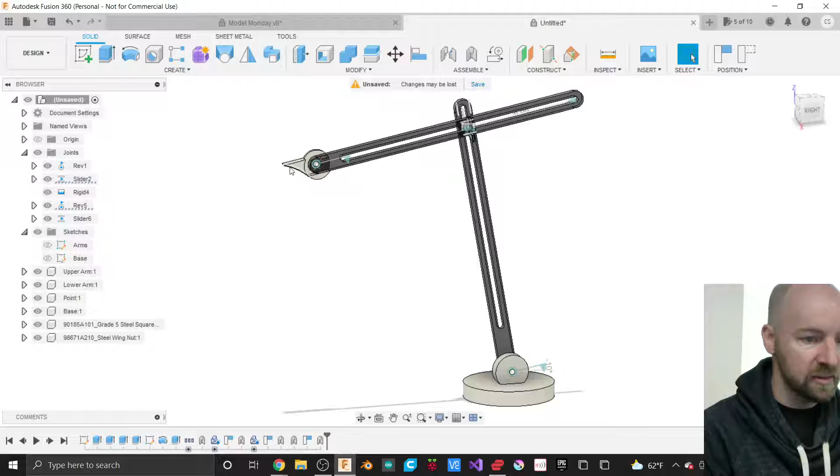So this point sets the height, and it sets the width, the opening of our pot here. But for our purposes in this class, it's an excuse for us to make a whole bunch of joints.

So there's a joint here at the end. We've got revolute joints, which we made in the last class. However, we also have sliding joints in this, so this gauge can slide up or down, so you can make it any height you need to. You can rotate it at the base, or lean it in if you want to. Obviously you'll be able to rotate it here as well.

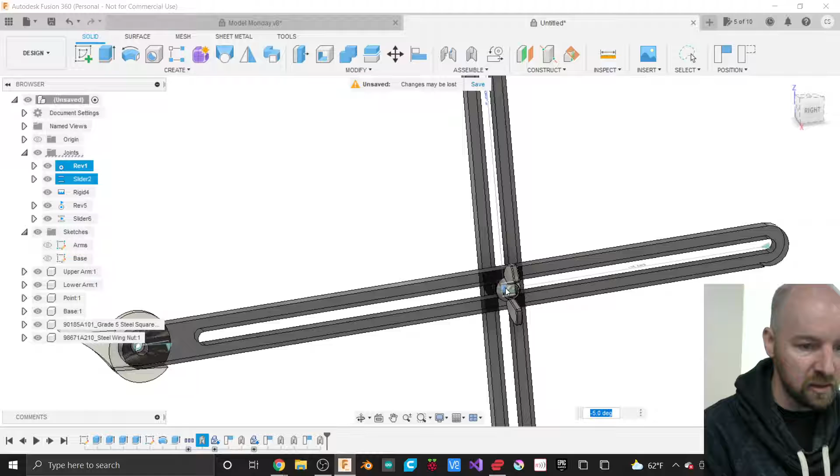However, I wasn't able to figure out how to add that joint in Fusion, so that'll be research for me for the next class.

But as you can see, we've got a whole bunch of joints, and you can slide them around and move them back and forth one at a time. Unfortunately, you can't do multiple joints at once, but you get the picture.

This base I'm imagining 3D printing, and then these arms I'm imagining laser cutting out of some plexiglass, so that'll be an easy process. And without further ado, let's go ahead and make this.

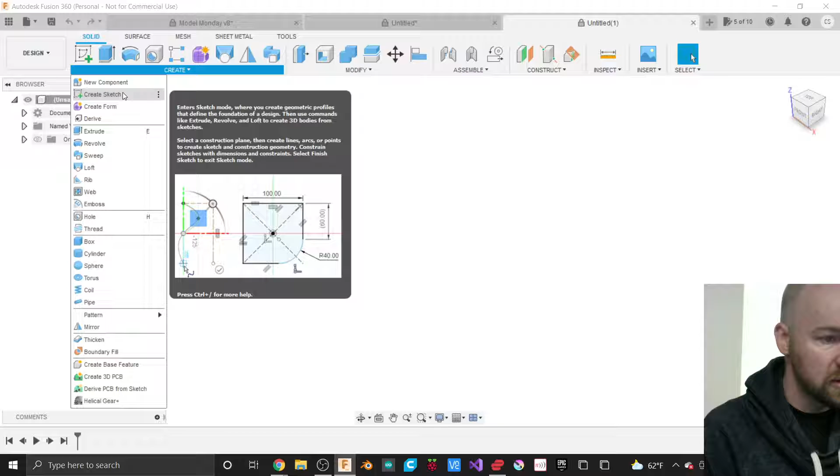I'm going to go ahead and start a brand new document here, a new design. And we are going to start by making some of the arms of our joint, of our throwing gauge here. So I'm going to grab my Create Sketch tool from the Create menu and create a new sketch.

I'm going to draw this sketch on the front plane, so I can move my view cube around to see my front plane a little bit more easily, and highlight it so I can spin that. Now I'm creating a sketch.

On this sketch, we are going to make almost everything for our throwing gauge. Forgive me if we do a lot of pausing here, just so you can see the sketches I'm making. I'm going to start by creating the first arm of our throwing gauge, and I'm going to do that by creating a couple of circles.

So I'm going to create a circle right at the origin, and this circle is going to be 3/4 of an inch, so 0.75 inches.

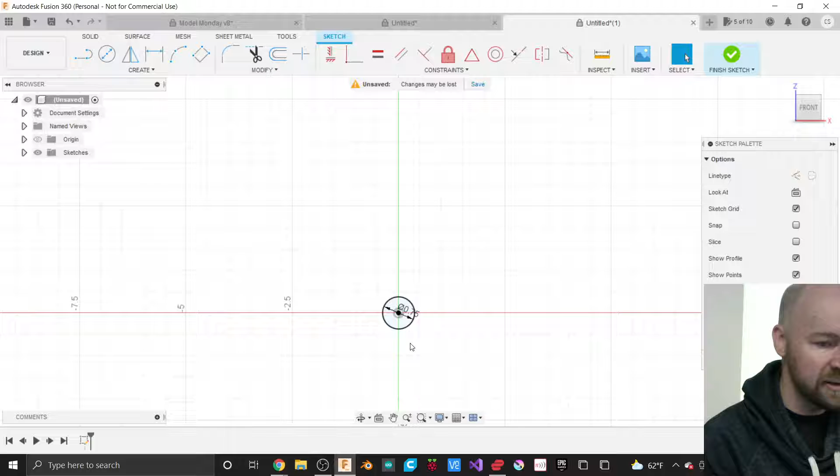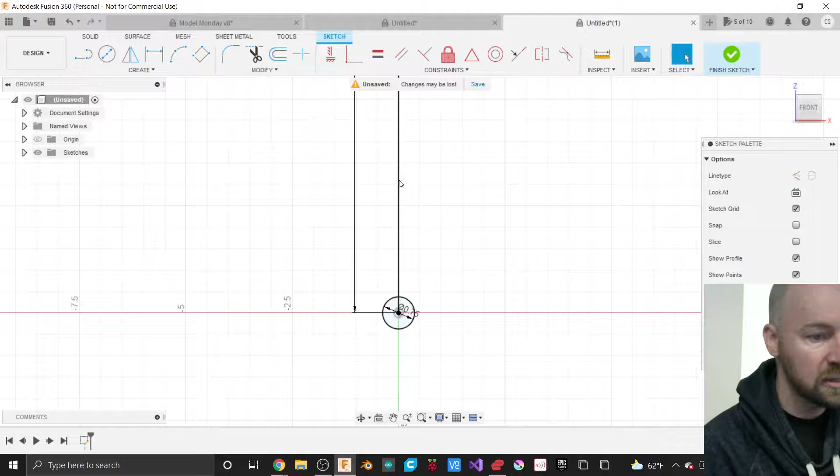I am then going to create a line that goes from the center of that circle straight up. This line is going to represent the height of our throwing gauge, so I was going with a length of 12 inches. That seems fine to me, but if you want to make your throwing gauge a different height, feel free to do so. But again, I'm going with 12 inches. Feel free to make your throwing gauge of any height.

And at the top of that line, I'm going to draw a circle, also 3/4 of an inch. I'm just going to do some cleanup here. So the 3/4 of an inch is going to represent the width of our throwing gauge.

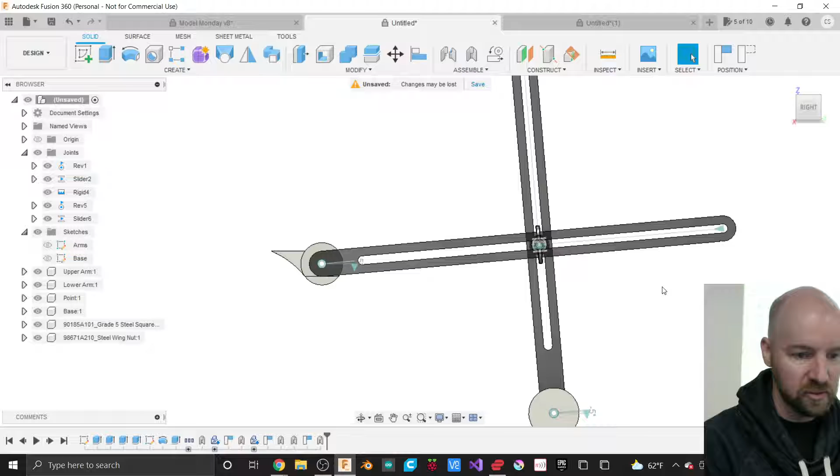And I'm going to need to make lines that represent the outside edge. So this part that we're creating, if I look at the side view here, you can imagine we drew this circle down at the bottom, we drew this circle up at the top, and now we need to make the edges of our shape, and I'm going to do that with the line tool.

So I'm going to go ahead and say create, then line. And I'm going to click and place a line at my top circle and move down, connecting to my bottom circle. And I'm going to do that again here, just clicking and placing a line.

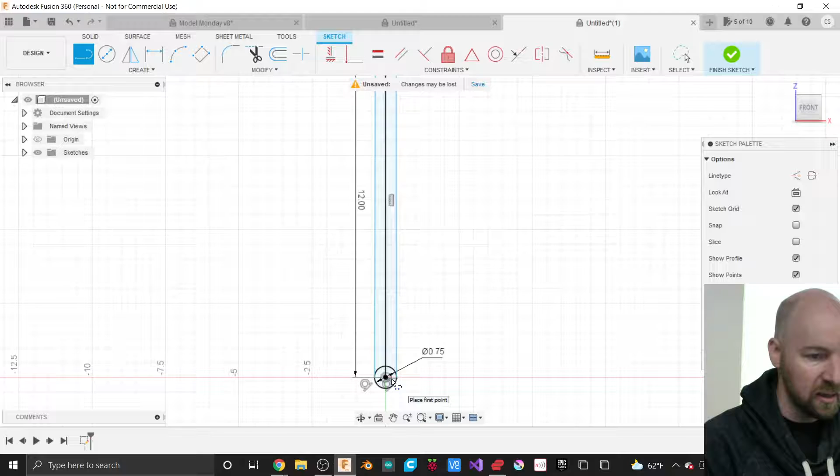Now, when I placed my line down here at the bottom, I was able to hover and get that tangent constraint to pop up, which is what I want. At the top, I could have held down the Shift key to force it to be tangent right from the start, but we can also just add a tangent constraint after the fact. Let me frame myself up better here. I added a tangent constraint to the circle and the line at the top by grabbing the tangent constraint from my constraints menu, and now that circle and that line are forced to be tangent with each other.

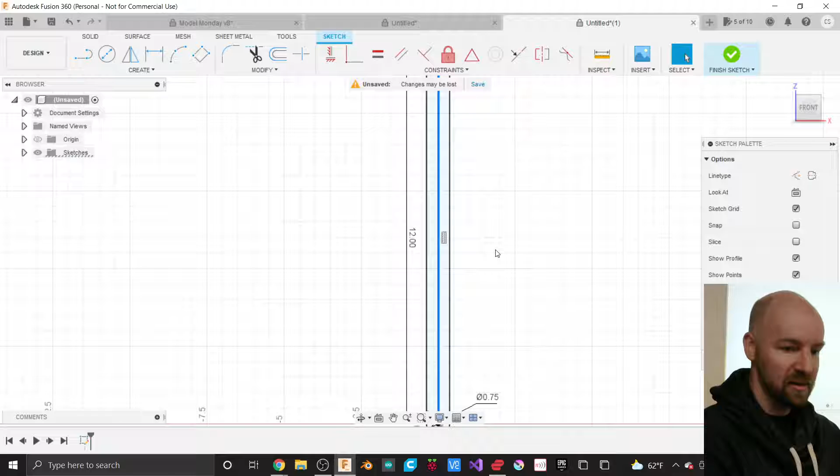This central line I really just used as a measurement tool, for construction purposes, you could say. So I'm going to turn that into a construction line just by hitting the X key, which will save us some steps later when we extrude these shapes. Now that line isn't broken in two by that solid line. You can also, from the sketch palette, turn something into a construction line by hitting the construction button in the line type option, and that'll change it to a construction line.

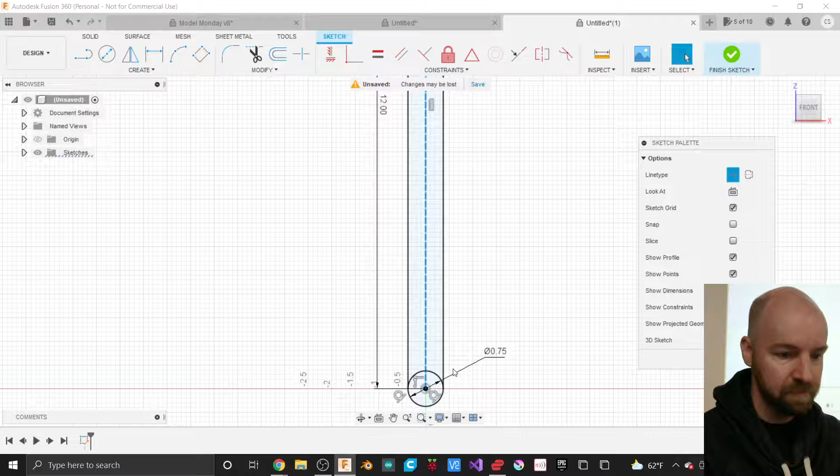Alright, now we need to make a couple more circles. Down here at the bottom, we need to have a pivot point. I'm imagining using quarter-20 hardware for all of this, since quarter-20 is pretty common and it's easy to find lots of different hardware in that size. So I want a quarter-20 bolt to fit nicely through this without a lot of friction, so I'm going to make this into a 0.26 inch circle down there — just a little bit bigger than a quarter of an inch, which gives some wiggle room for the bolt so there's not too much binding.

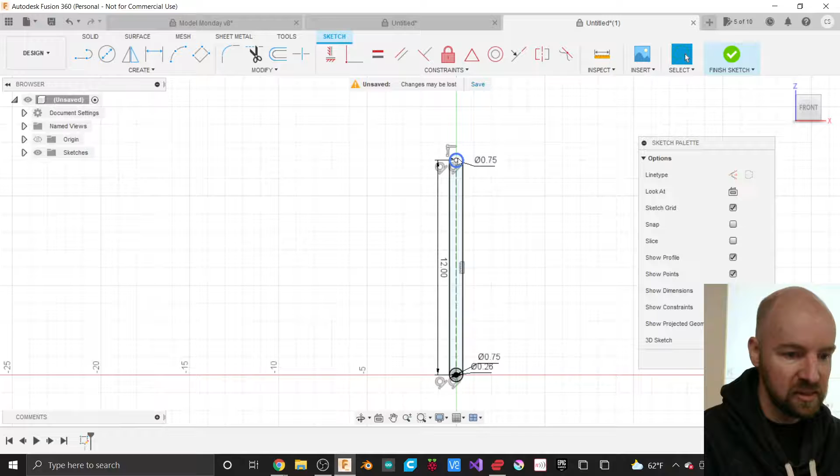I'm going to do that same slightly larger than quarter-inch circle at the top here, so we get a 0.26 inch circle at the top. Now the last circle we need to make represents the end of our slot. Down here near the bottom, I'm going to add one more circle that's 0.26 inches.

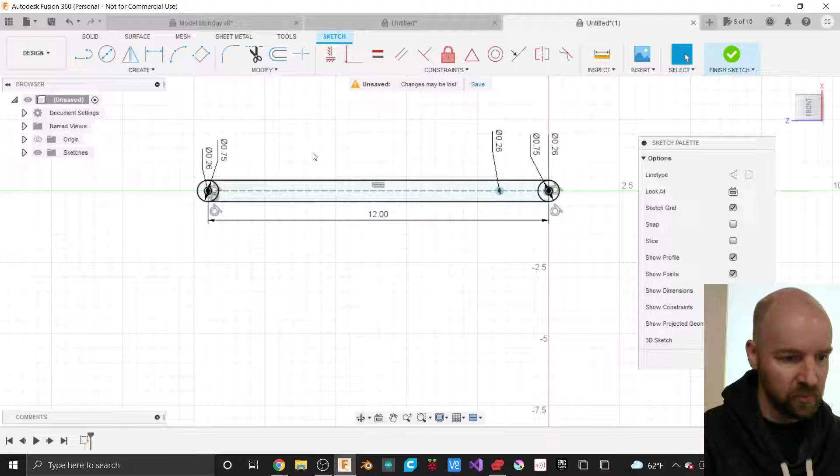Now is probably a good time for me to take a brief pause while I organize my sketch a little bit. I can rotate it sideways, and that'll let you see it a little bit better.

There are two more lines that we're going to add to this sketch, but let me take a brief pause just in case I was drawing too fast. Was I drawing too fast? I tend to draw too fast. I could take a Frito break, a little Frito pause. Pause for the Frito cause. Support your local Frito-Lay company — I mean, they're distributed locally by the gas station that somebody bought this from. So, how are you guys doing at home? Did I go too quickly? Good? Cool. All right, excellent.

All right, so now I'm going to draw the final two lines that make up this little arm sketch here. Those lines are going to be similar to the way I made these lines — I made these to connect these two circles here, and I'm going to make my next lines to connect these two circles here. So I'll grab my line tool and click up here at the... come on, you can do it. Doesn't want to — there we go.

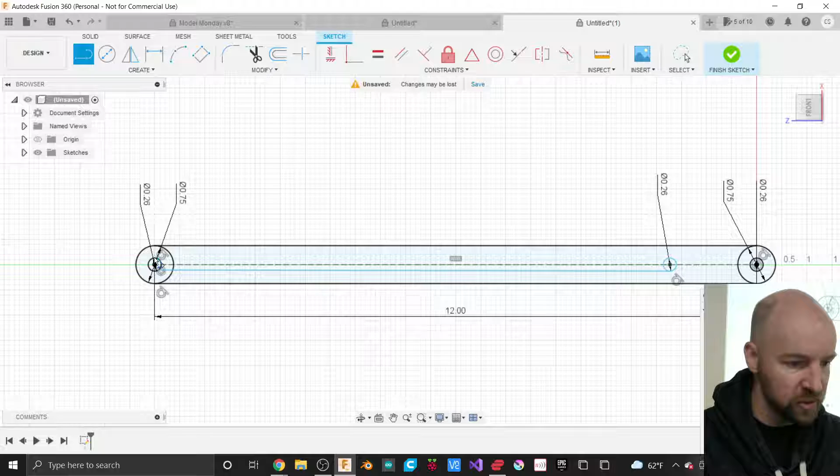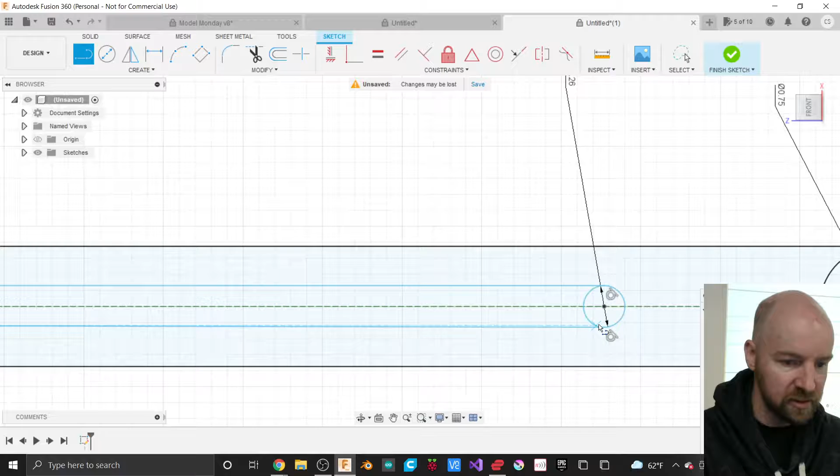So I click and place my line, then hover so I get that tangent constraint to pop up, and I'm going to do that one more time here. These are small features, so I'm going to zoom in and make sure I'm snapping, because it's easy with small features to accidentally draw your line off to the side slightly and not quite snap to the point you want, since you definitely want a solid connection to that line and that circle.

The same way I did the first time, I'm going to add those tangent constraints up at the top. This is much more important for this inside track, because this is literally the track or the slot that our 1/4-20 carriage bolt is going to slide up and down in. So we really need these two lines to be parallel with each other, and one way we can do that is by making sure they're tangent to circles that are the same size. Because these circles are the same size, these lines will be parallel to each other and maintain a constant width the whole time.

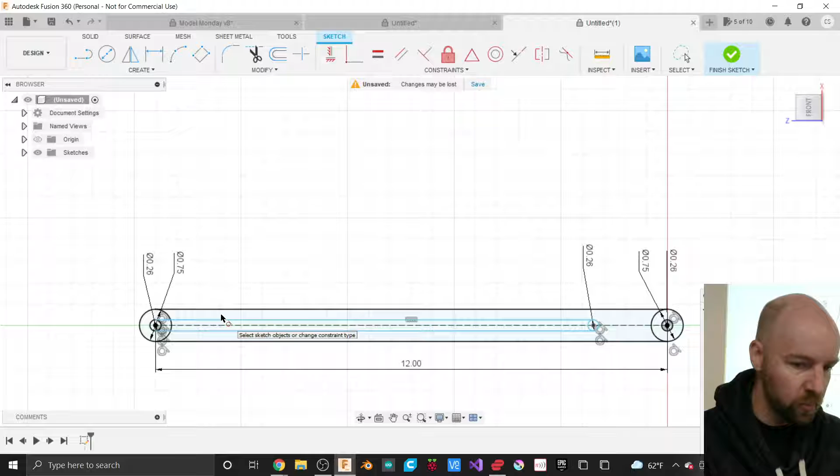Okay, cool. So we're basically going to do those same steps again in order to make the top section of our arm. I guess I'm going to choose to do this all in the same drawing. But now I'm second guessing whether I want to make it on different drawings. I think I am going to do this all in the same drawing.

Sometimes it's nice to break up a drawing into multiple sketches for the sake of organization and your own sanity. But there's really not a whole lot to this. The only thing left is just this top arm, and we're going to make it similar to how we made that bottom arm. In fact, we've already got one of the circles drawn for us.

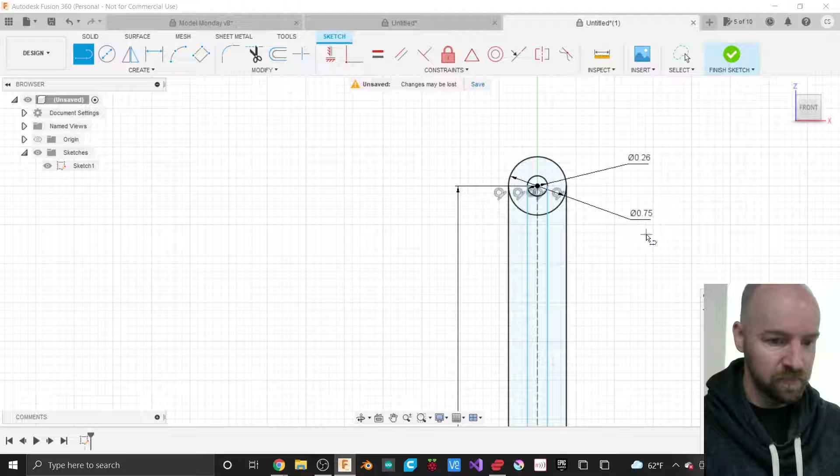So I'm going to go ahead and grab my line tool, and I'm going to draw from this center point of these top circles, and I'm going to draw it out. Now this is going to represent kind of the maximum reach that our throwing gauge can go to. So I'm going to make this again 12 inches.

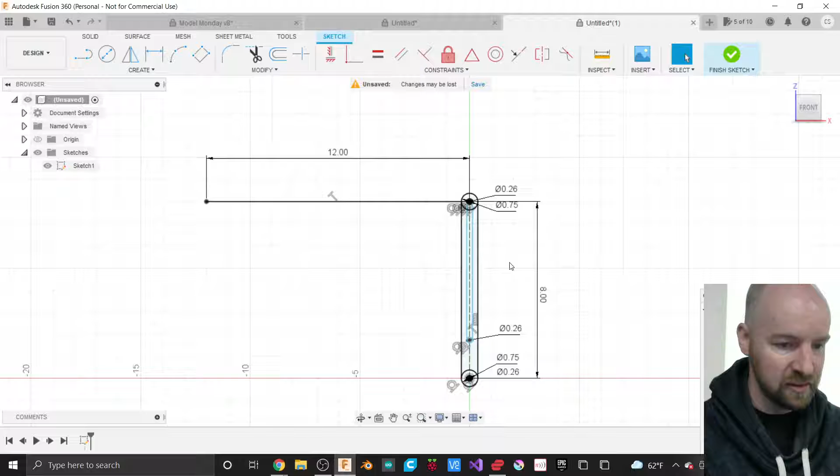I don't really know. I probably should have walked over to a pottery wheel before I started drawing and done some measurements. But the beautiful thing about Fusion is we can always go back and change these measurements later. So even right now, for example, if I say hey, turns out I only need this to be 8 inches of height, it's real easy to just change that one measurement, and now we've got an 8-inch tall gauge instead of a 12-inch tall gauge. I'm pretty sure that I am going to need like 12 inches height, so I'm going to change that.

Alright, so now we can make a couple more circles here, and the circles that we're going to make are at the end point of this long line. In fact, I'm going to go ahead and turn that into a construction line right now.

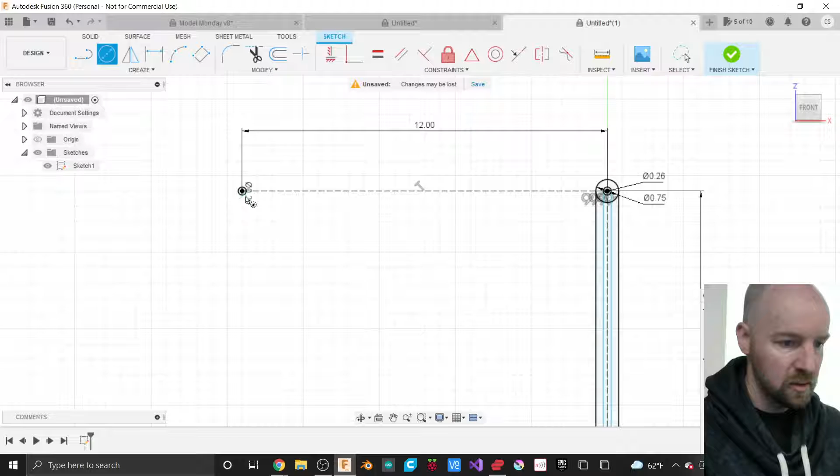So I'm going to go ahead and grab my circle tool one more time. I'm going to place it out here and make a 0.26 inch circle, and then a second circle of 0.75 inches.

And then the very same way that we connected the circles for the bottom of our arm, we're going to connect the circles for the top arm here. So I'll grab my line tool, either from the Create menu, I can come in here and say Create and then Line. Or, since I've been in the habit of learning keyboard shortcuts for tools you use regularly, L is the keyboard shortcut for the line tool.

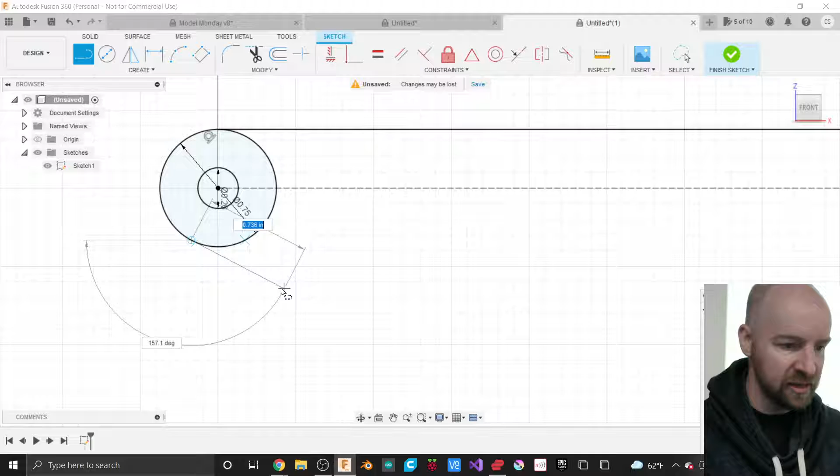And this time you can see here's my little keyboard shortcut trick. So if I hold down the Shift key before I click and place the beginning of my line here, you can see because I'm holding down the Shift key, this is going to maintain that tangent constraint to that circle. So if I know I want to have a tangent constraint at the beginning of my line, I can hold down the Shift key and then click. Oh no, I can't let go, I've got to hold down the Shift key.

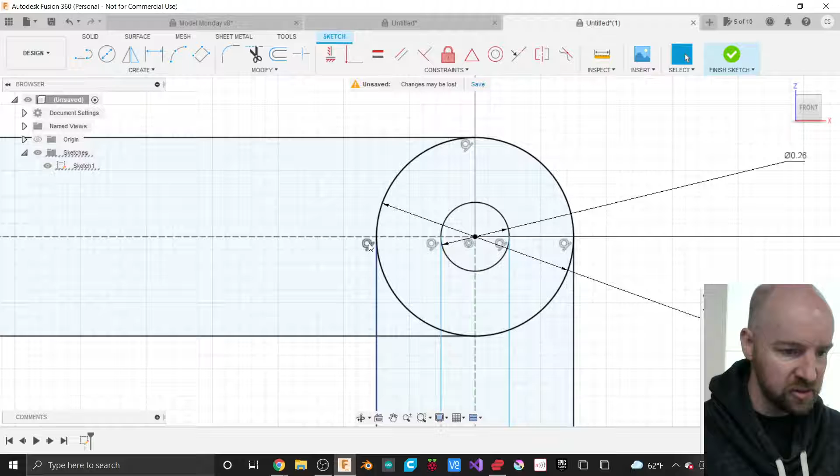Can't zoom in while you're holding the Shift key though. So if I'm holding the Shift key again, I can make sure I get that tangent constraint to pop up here on this circle. And I can zoom in here and see these little icons are my tangent constraint icons. We can see that I've got tangent constraints at all of the intersections between my lines and my circles, and that's exactly what we want to do.

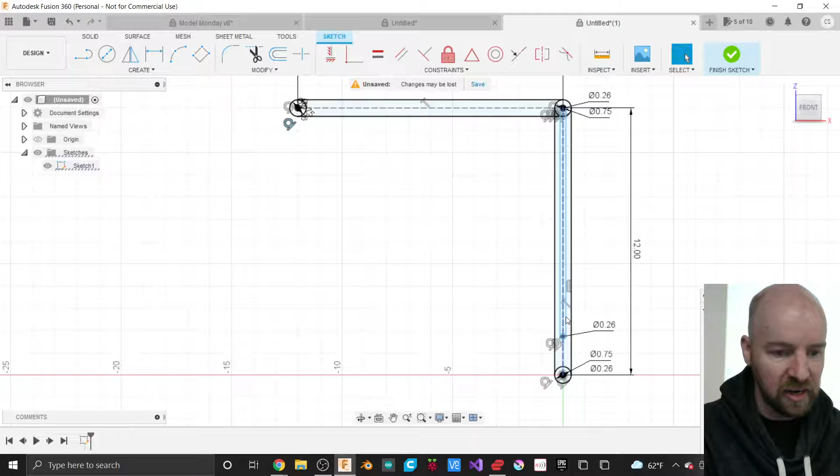While we're talking about constraints here, the way that you know a line is fully constrained is because it turns black. Now I have some lines that are blue here, and that's because those lines are not what's considered fully constrained. That's because this circle, this end of my slot here, doesn't really have a distance. My slot doesn't have a distance. So my total width here is 12 inches, but my slot is something less than that. And if I wanted to, I could specify a distance for that.

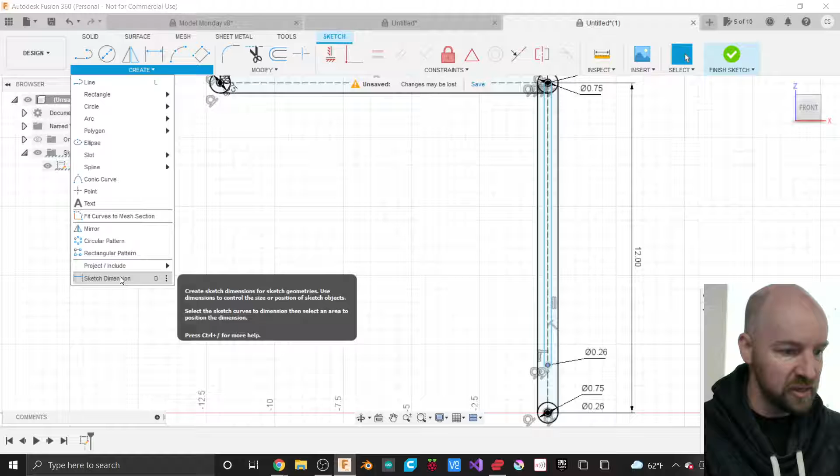So I'm going to go ahead and do that. In fact, I think I can specify a distance here. If I go ahead and grab from my Create menu, I can choose this Sketch Dimension option. And just like I can add a constraint after the fact, I can add a dimension after the fact. So if I click these two circles, oh, will it let me do that? It's not going to let me do that. Can I give a dimension to that line?

That's interesting. Why? Maybe I'll give a dimension down here. Nope, I still have my dimension tool. So I'll click this circle and I'll click this circle. There we go. So now I can place a dimension down here, and you can see as soon as I place that dimension, both of those lines became black. Now I could just type a number like 1.5 inches here.

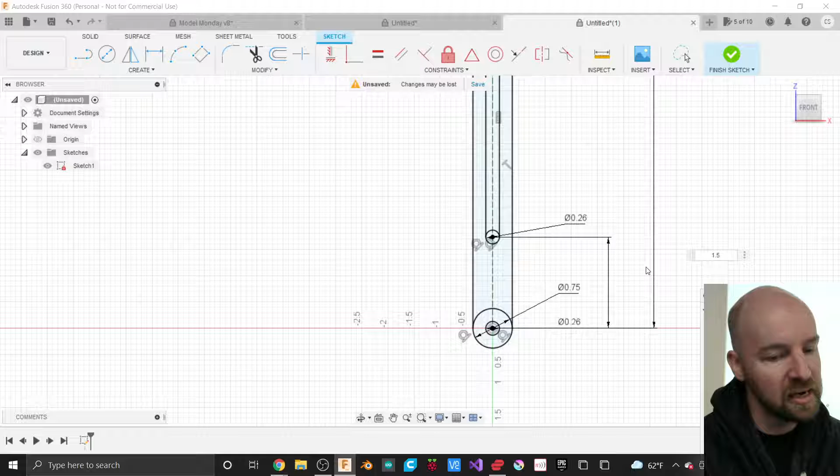I guess that's probably what I'm going to do, because whatever height I make this will just still be 1.5 inches. So if I change this to 6, it gets much shorter, but again, my 1.5 inch distance stays the same here, as opposed to if I were to dimension between these two circles. Every time I change this length, I would have to change that other length as well. So I'm glad that I chose to do those bottom two. Alright, but again, I'm going to change that back to 12.

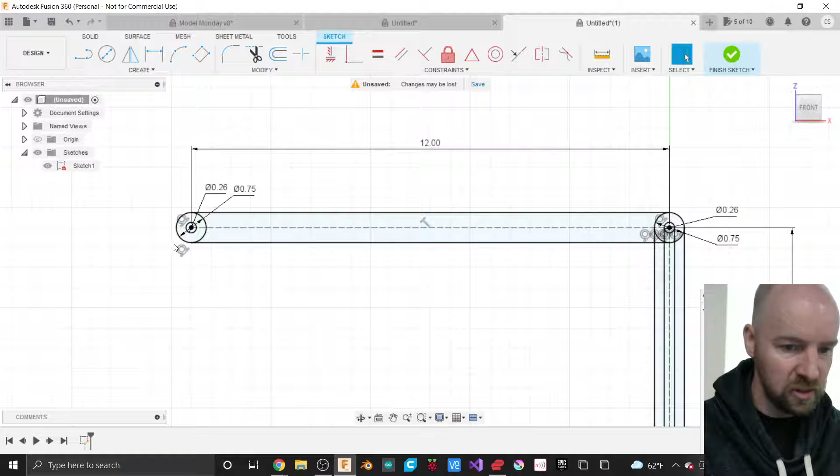And now we can add our last two lines here. Those lines are going to be connecting the small circles for our top arm. I'm going to kind of place my dimensions so they're a little easier to read. And I'll go ahead and grab my line tool again. I'm going to hold down the Shift key before I place the start of my line. And now I'm snapping to that tangent constraint.

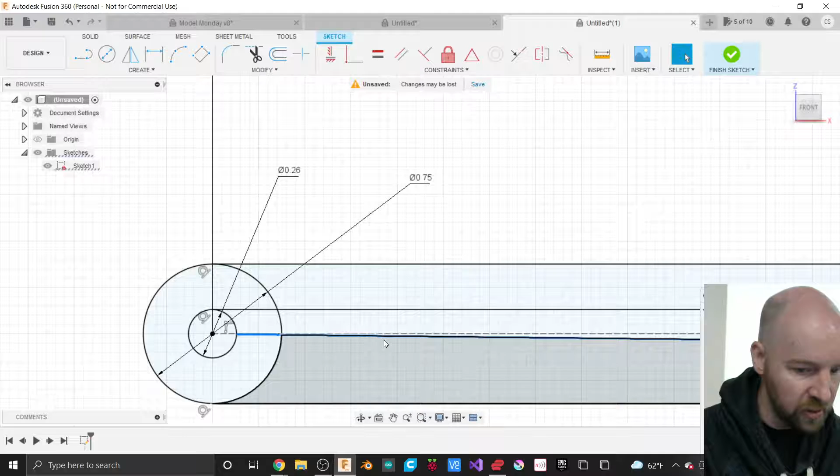Do that one more time here. Oh, that's interesting. That didn't work at all. So I have a line that didn't work, and in fact it looks like it's giving me some sort of weird coincident constraint. It thought I wanted to snap to the middle, so I'm just going to go ahead and save myself some trouble and just delete that line. Sometimes deleting is the way to go. And you know, sometimes if you've got to zoom out and then zoom in order to place a line, holding down that shift key doesn't work out so well. So it may just be easier in some cases if you've got to zoom out and zoom in just to add those tangent constraints later.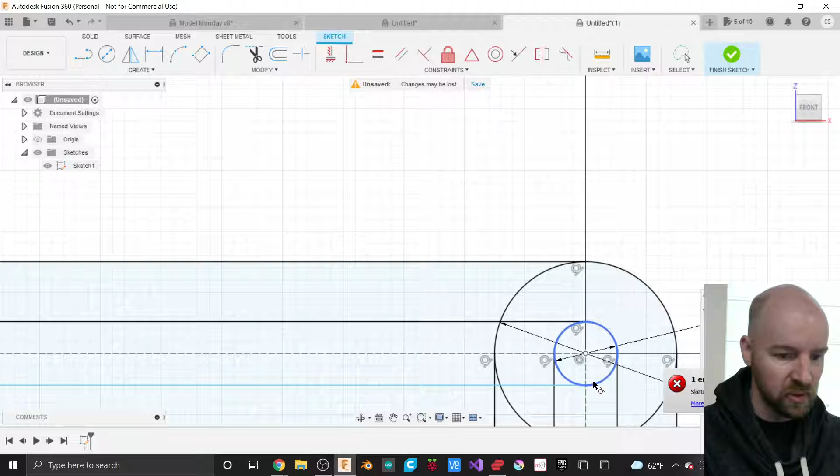Over constrain, probably because I snapped to that intersection there. And here, there we go. All right. So now we just have a couple, or how are we doing? Am I going too quick?

I have no idea until I try extruding if the right stuff is connected to the right stuff. Okay, cool. Tell you what, that's a good suggestion. Let's go ahead and extrude some stuff now, because we can always go back and add stuff to this sketch, right? So I'm going to go ahead and say Finish Sketch.

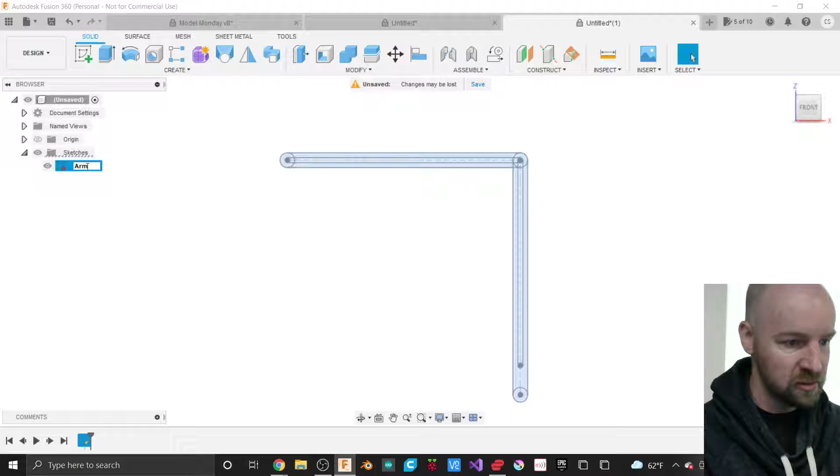I got a sketch in my Sketches folder. You guys know I like to keep up on naming stuff, so this sketch is going to be called My Arms. Not your arms, my arms.

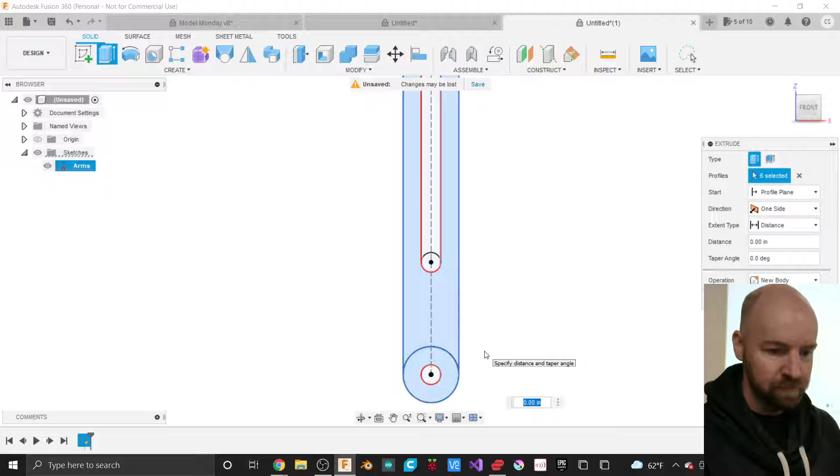All right, and now we can extrude some things. So let's start by extruding this upright arm. I'll go ahead and click on Create, and then Extrude, and I'm going to go ahead and click on all the bits here that I want, because you can imagine what we want here is an open slot down the length of our arm here, and then we want to have an open hole at the bottom where we can have a rotation point, and then a slot that goes all the way up. And I'm going to extrude this one negative.

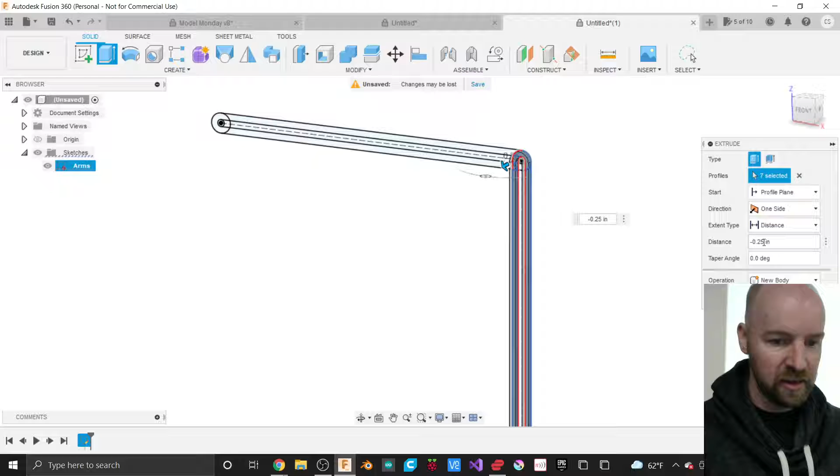So I'm going to extrude a negative 1/4 of an inch. You can do yours as a positive, but the key is we're going to extrude both of our arms in opposite directions. So this first one is coming towards me 1/4 of an inch, and the next one is going to go away from me 1/4 of an inch. I'm seeing, I gotta zoom in here because I got a little kibble down here to pick on. Alright, so that looks like all the bits from that first arm. I'm making it a new body, negative 1/4 of an inch, and I'm going to say OK.

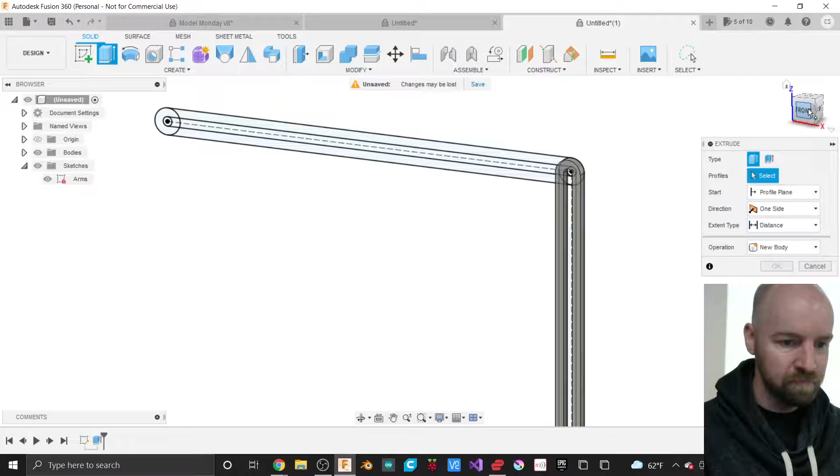Cool, so now I can extrude my top arm, and then that'll be the moment of truth. We're going to do it the same way, so I'll go ahead and click on Create, and then Extrude. And the top arm, I'm actually going to spin around to the back. So I'm on the front right now, but if I use my view cube and spin around to the back, it'll be easier for me to click on all these kibbles over here. I can kind of zoom in and make sure I get all the little bits, and I'll zoom out and do the same over here.

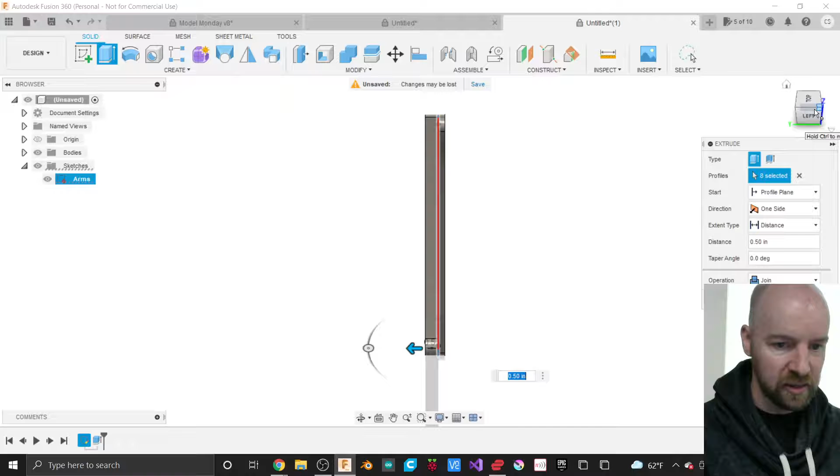Now something key here is when we extrude this, we want to make sure we go in the right direction. My first extrusion happened out towards me, but this one is happening away from me, so they're going in opposite directions from each other. The first one went a negative quarter of an inch, and this one is going to go a positive quarter of an inch, because they're going to meet up with each other and rub next to each other like that.

And we don't want to join these bodies together. We want these to each be a new body, so I'm going to make sure I choose new body there. And then I'll say OK.

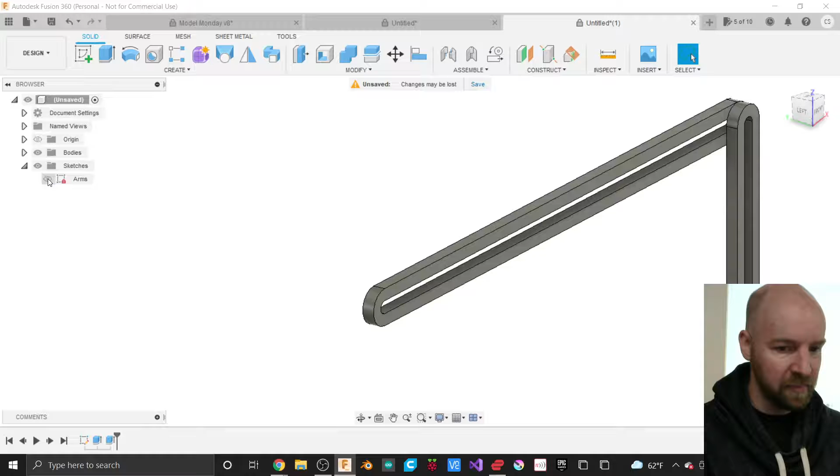If I want, I can hide my sketch. I've got a couple of bodies to name, so you can see this is the goal we're trying to get to here, where we've got one body that comes forward, which is going to be my vertical, and that's going to be my horizontal. Just anything is better than Body 1, Body 2. All right, cool. So that's where we're at so far.

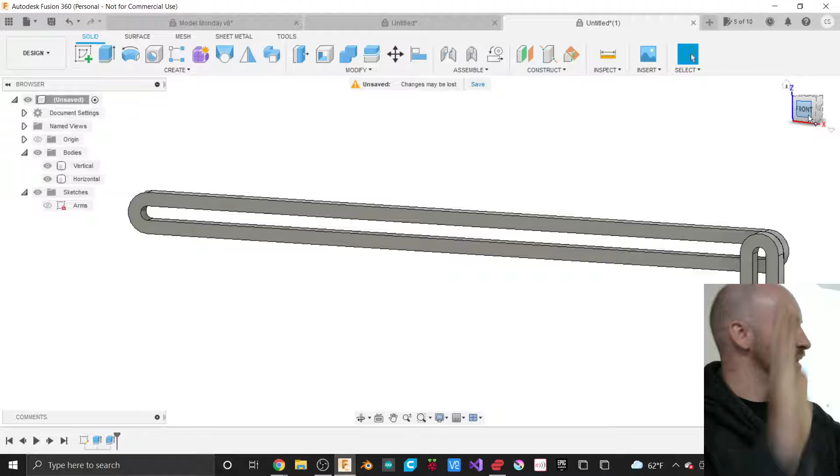How are we doing? Yes. What are you guys making now? We're making throwing gauges. It's a selfish project for me because I want one. And also, we're going to add joints to these throwing gauges so we can get people moving. We learned about joints last week, and we're going to continue that knowledge this week.

Cool. All right, so are you all with me? Are you following along at home? Are you following along here? Got some questions? Let me peek over a shoulder here. How are you guys doing at home?

Oh yeah, well, I extruded here, but then when I went to extrude this arm, it discombobulated the first arm that I extruded. Yes, if you right click on that down there and say Edit Feature. Let's look at a little bit more of a three-dimensional view of that. So it's cutting into that first shape.

Okay, so you take that arrow and make it a negative. Okay. And then, right, new body. There we go. Now you're looking pretty good. Okay.

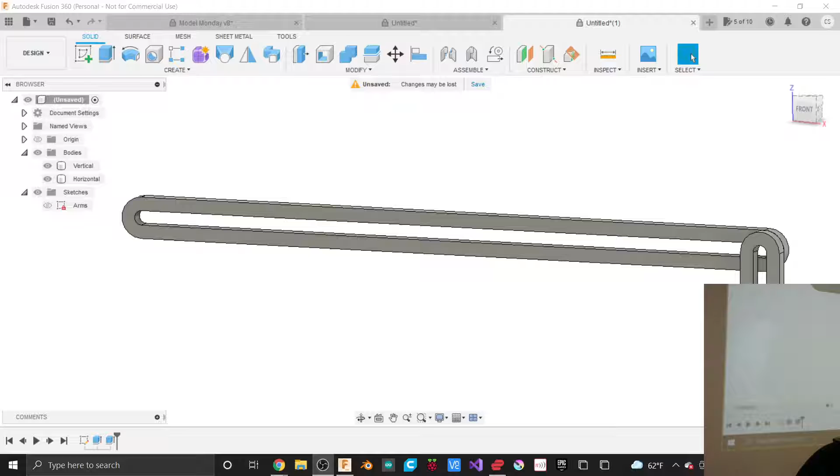Cool, you got two bodies in your body folder? How you doing? Yeah, I know. Cool, yes, nice, I have a Body 1 and a Body 3. All right, now you can name those, you can leave them named Body 1 and Body 3, I won't judge you, I promise. But I'm too OCD for that, I get confused easily so I've got to name my stuff. Otherwise you can call it Bob, Harry, Tom, Brenda. Yeah, all names are acceptable.

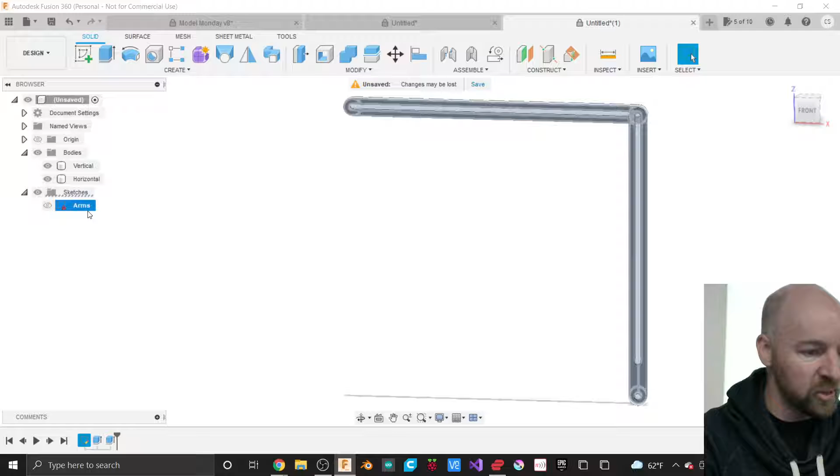All right, so now that we've got our arms drawn, let's go ahead and draw the base for our little creation here. I'm actually going to draw the base on the same sketch because I can, and you can't stop me. So I'm going to go ahead and edit that sketch. Over in our sketches folder, I've got my sketch that I appropriately named arms, and I can right-click on that sketch and say Edit Sketch.

The other way I could do this is down here in the timeline. This very first icon down here, if I hover over it, tells me that's my arms sketch, and it does that because I named my sketch arms. Otherwise this would be called Sketch 1 or something like that. It's another reason to name things. So I can right-click on that down in the timeline and also say Edit Sketch.

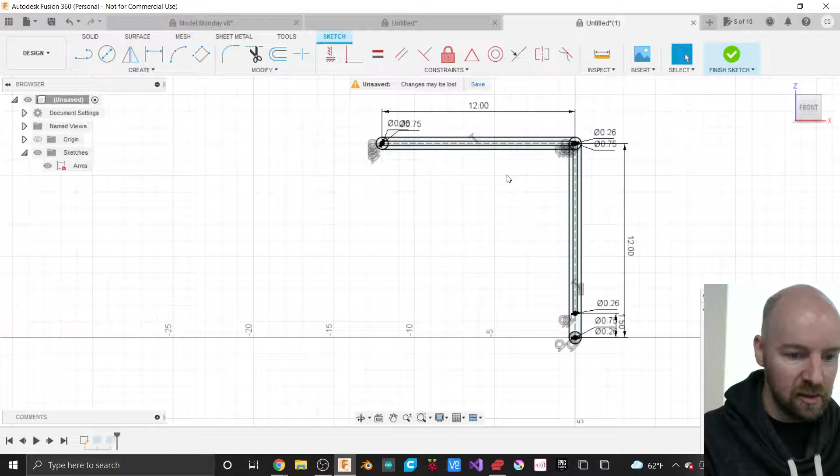And now I go back in time, so all my extrusions are grayed out down here in my timeline at the bottom, because I'm back in time before I made those extrusions. We can go down here to the bottom, or what will be the bottom of our shape, and draw a couple more circles.

So if I go ahead and grab my circle tool, either from the Create menu I'll choose Center Diameter Circle, or if we're getting used to keyboard shortcuts like I am, we can hit the C key for Center Circle. I'm going to place that center diameter circle concentric with those bottom two circles, and make this like 2 inches—seems good.

A nice beefy little circle here, a 2-inch diameter. I'll scoot that measurement off to the side where I can see it a little bit better, and I'm going to place one more drawing here.

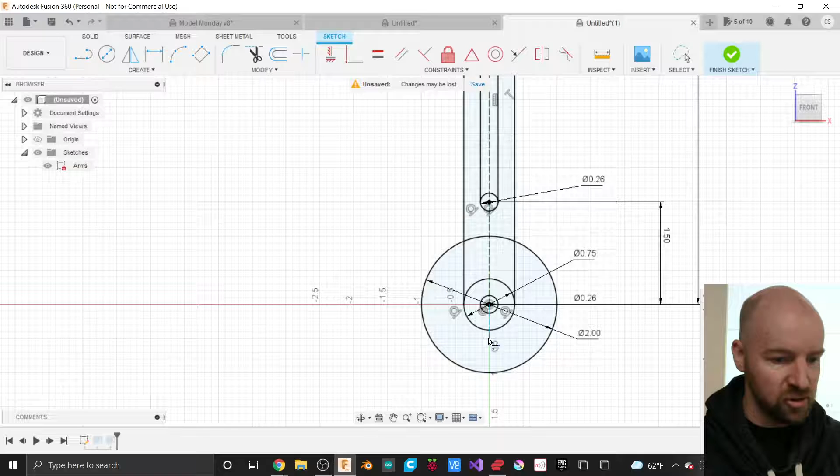If I click on Create and then Rectangle, I'm going to make a 2-point rectangle here, and place the start of it just down below my 3/4 inch circle somewhere, so I can actually add a dimension to this later. I'm going to just place it down below here and give it some dimension.

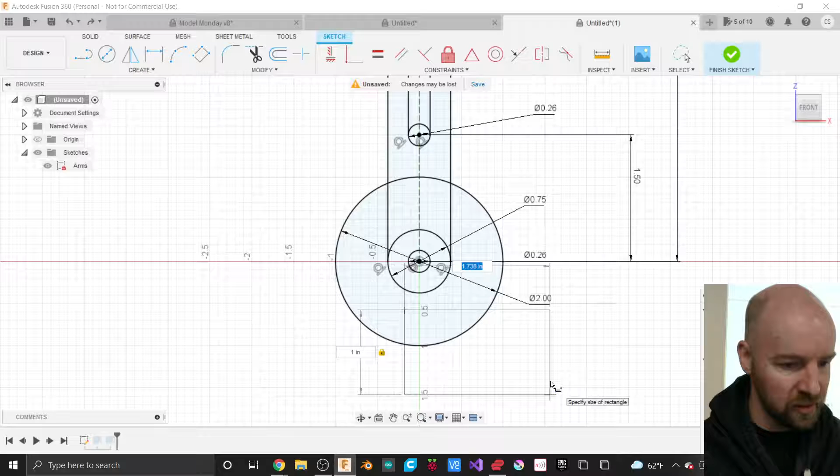In fact, I can purposefully place it in the wrong spot. So I'm going to place my rectangle definitely in the wrong spot here, give it a height of 1 inch, and a width of 2 inches as well. That'll be fine.

Now I'd like the point of this rectangle to be directly underneath the center of this circle here. I didn't draw it in the right place, but I can use some constraints to make it pop into place. The constraint I'm going to use is the horizontal/vertical constraint, which comes in handy. This constrains a single line or 2 points to lie on either the vertical or horizontal axis, so really I can make anything appear directly underneath or directly to the right of something else.

The thing that we want to do the moving is this rectangle, so we're going to click on that part of it first, and then the thing we want to move it to is alignment with this circle here. And you can see that goes ahead and pops right into place.

It's interesting to me that we've got some blue lines and some black lines. It tells me it's not fully constrained, but I'm going to add one more constraint here, a dimension constraint. So if I go up to my Create menu and grab my Sketch Dimension option...

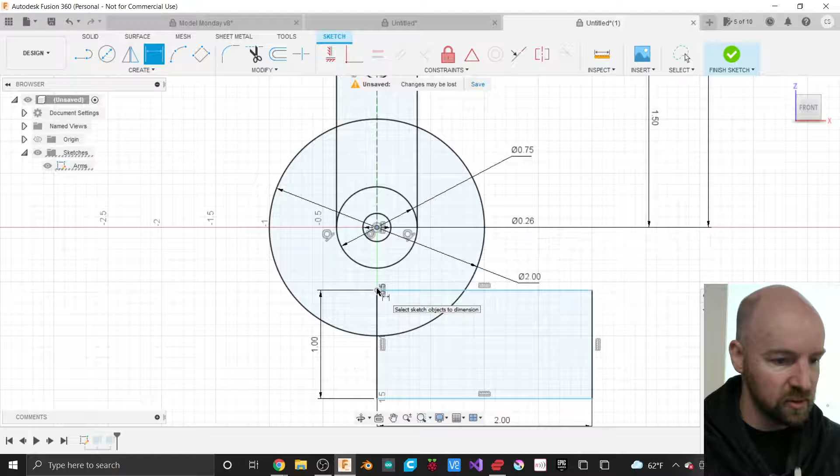Just like I added a dimension after the fact for the distance between these two circles, I'm going to add that dimension for the distance between the center of that circle and this point here. I can place that dimension off to the side, and I'm just going to make it a 1/2 inch. I think that's fine. There's a little bit of gap there. Now my lines all turn black.

So it's interesting that these top and bottom lines needed a vertical constraint in order to become fully constrained. Alright, so that is all we're going to add for now to this sketch here.

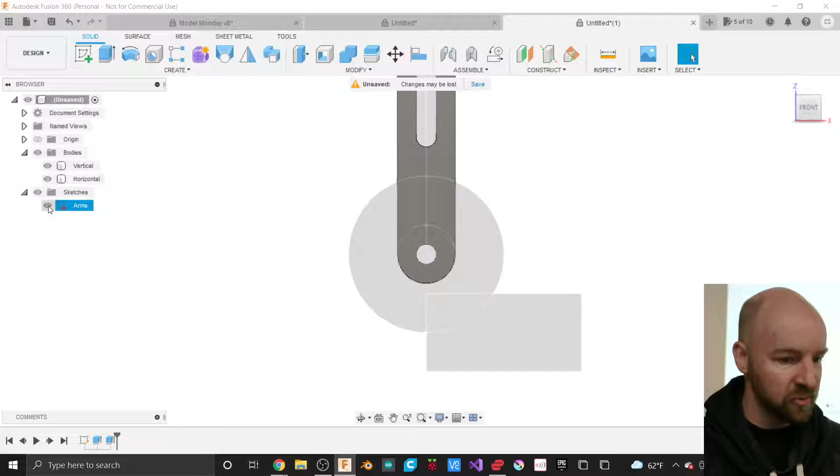And now if we say Finish Sketch, something that's kind of nice is we didn't have to change anything about our first extrusion. Even though these circles or lines overlap with our extruded parts, it doesn't mess up and choose the wrong things to extrude in the future.

So now we can go ahead and extrude out one of our things here. Let's extrude out our circle. I've got to go around to the back side of this, and I'm going to extrude everything except for this little 1/4 inch recess here.

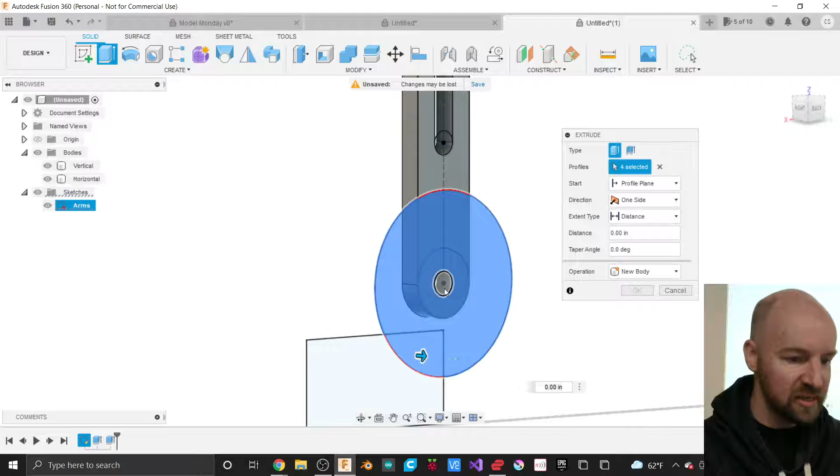I'm going to look at it from the side here so you can see my sketch exists on the front side of this. So I'm going to pull my arrow out kind of away from my existing arm here, and enter a dimension. Let's make this 1/2 inch, nice and beefy.

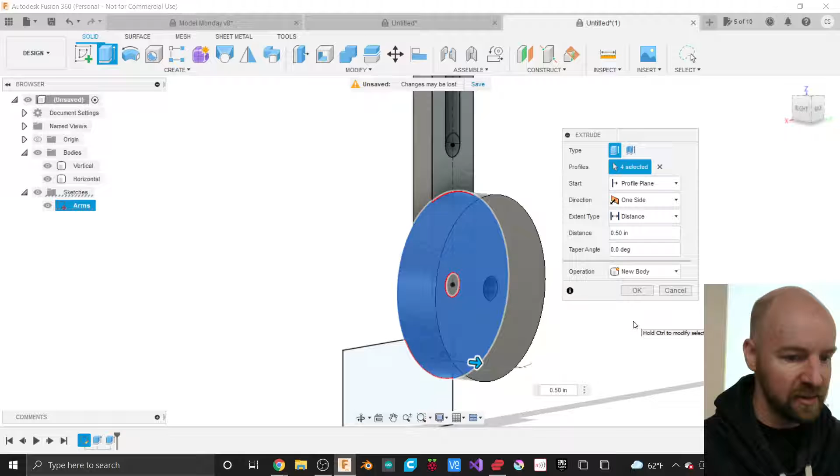Now the default here is join, but I actually don't want to join. I want to make this a new body, because this is a whole new ball game here that we're making down here, which is our base. So a new body, and I'm going to say OK.

Now the next thing we're going to want to do to finish the creation of our base is that rectangle that we drew down here. I'm going to revolve this. If I go ahead and click on my Create menu and come down to this Revolve option, I'm going to choose the parts of my rectangle here, and as an axis to revolve these around, I'm going to use the inside of my rectangle here.

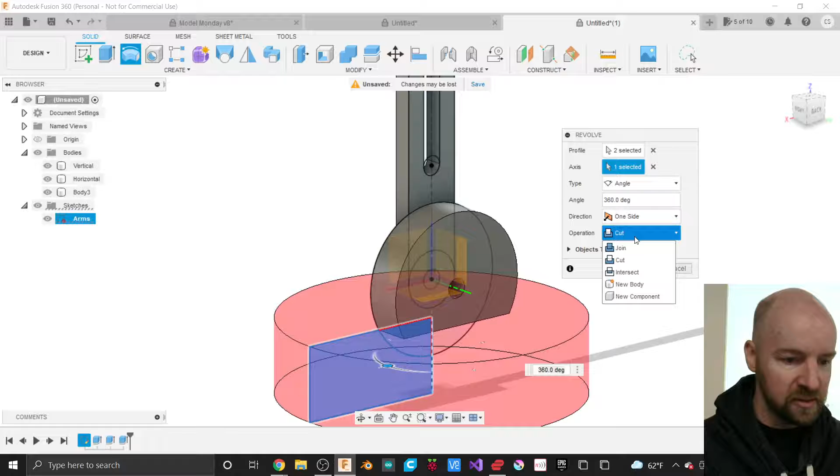Now you can see it's defaulting to a cut operation, but I actually want to make this a new body as well. Now, maybe I'll do this wrong. So I'm going to go ahead and say join, but you should not.

So if I do this the wrong way, and by the wrong way I mean the way that you get to learn more stuff—oh, look, it didn't. So sometimes when you choose to join, it kind of joins everything. This body is touching this body, and this body is touching this body, and this body is physically touching that upper body.

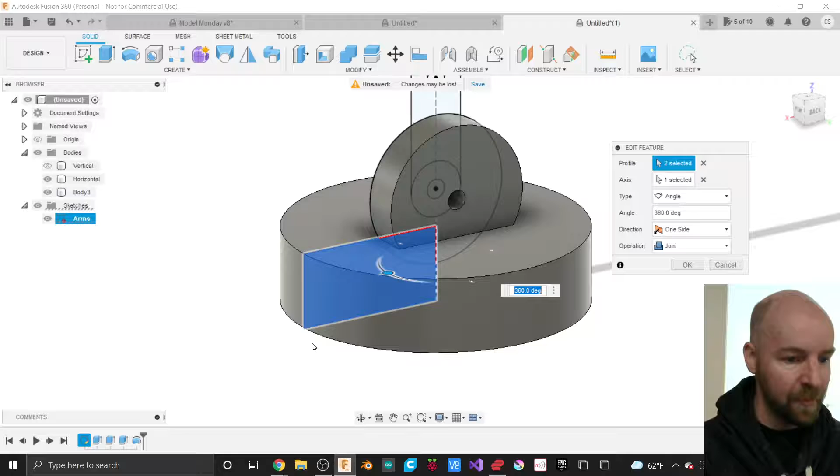Sometimes when you say join, it kind of just joins everything together, and a way to avoid joining things you don't want joined when you're choosing this join operation is to just turn them off in your bodies folder. So in my bodies folder, I definitely don't want to join it to this vertical arm. I can hover over my bodies folder, turn the little eyeball off, and now I won't accidentally join these things to that vertical arm when I choose join. And I'm just going to say okay.

So now we got one more body to name. This is our base, because you know it is all about the base.

Alright, and now we're going to make the one last shape that we're going to need here, and that's our little flippy pointy bit at the end here. That is the technical term for it, the flippy pointy bit.

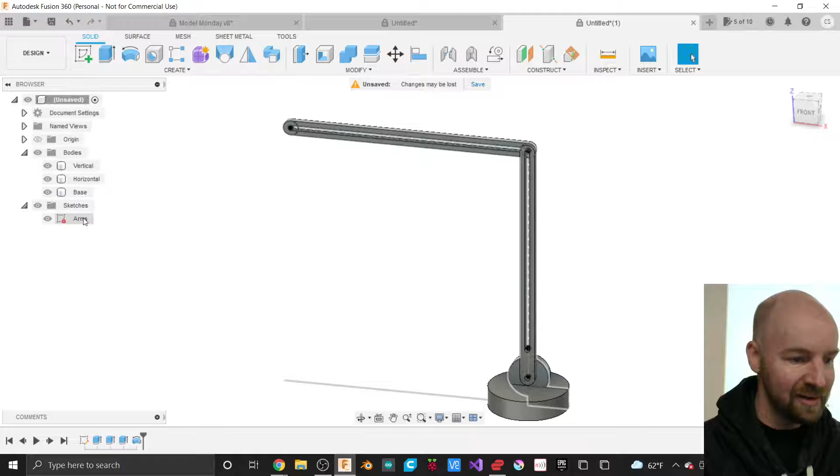In order to do that, we're going to go ahead and edit our sketch one more time. Actually, maybe I'll pause. How are we doing at home?

Did we get a base? Thumbs up? Cool? Kinda? Tom's like kinda? Ish?

Oh, I can get those numbers up for you one more time here if you want. So I made my circle a 2-inch diameter circle, and then my rectangle here was a 1-inch by 2-inch. These are kind of arbitrary.

I guess you want the base to be heavy enough that it's not going to fall over real easily, so you want it to be somewhat substantial. Depending on what you're going to make that base out of, it could be smaller if it's a nice piece of aluminum that you're going to machine this out of somehow. I was just planning on 3D printing mine because that's easy, so I want a nice big base, and I suppose you could add weight in other ways, or maybe attach it with magnets to the wheel. That could be a thing too. But anyway, a 2-inch circle, and then a 1 by 2-inch rectangle there.

Alright, so now we're going to make the last part of this physical drawing that we need to do, and that's our point at the end here. So I'm going to turn my arms sketch back on here, and I can either right click on that and say edit sketch, or down here in my timeline I could right click on the sketch in the timeline and say edit sketch. And now I'm going to zoom right up in here to the top.

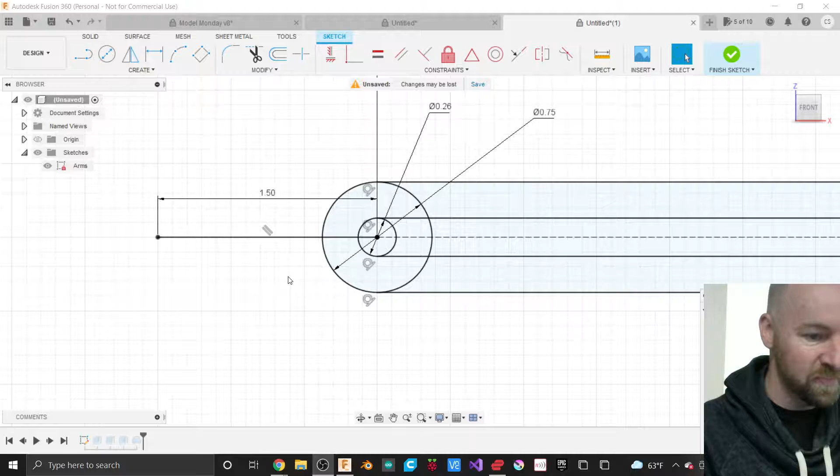Alright, so I zoomed in here to my sketch. So I right-clicked and I said edit sketch. So I'm going to go back again. I'm going to right-click. I'm going to say edit sketch down here in my timeline.

And the part that we're making is a little flippy bit down at the end. There's like a little arrow at the end of this thing. That's kind of the point of our gauge, the exact point that you're throwing to. And so I made a line that came straight out from that end circle.

I'm going to turn that into a construction line just because I wanted this to specify a distance here. And now I can click and place 2 more lines that will connect that end point and be tangent to our circle. So we got a little pointy arrow kibble down here at the end. And then I'm going to say finish sketch.

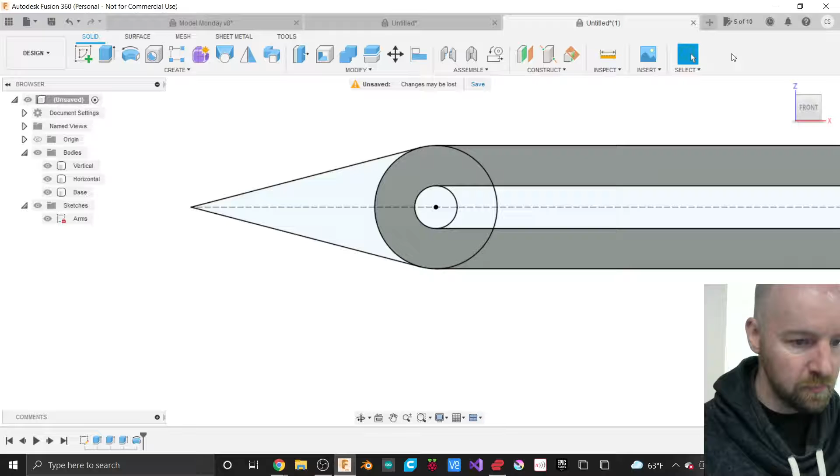Now this last thing here is to just go ahead and extrude in this little pointy bit. It's going to be the circle and the pointy bit, and I'm going to make sure it just comes out towards me, just so, and this can be real narrow. This only needs to be like point. I'm going to make it 1/8 of an inch. And I'm making sure that this comes out towards me and doesn't kind of go into my arm.

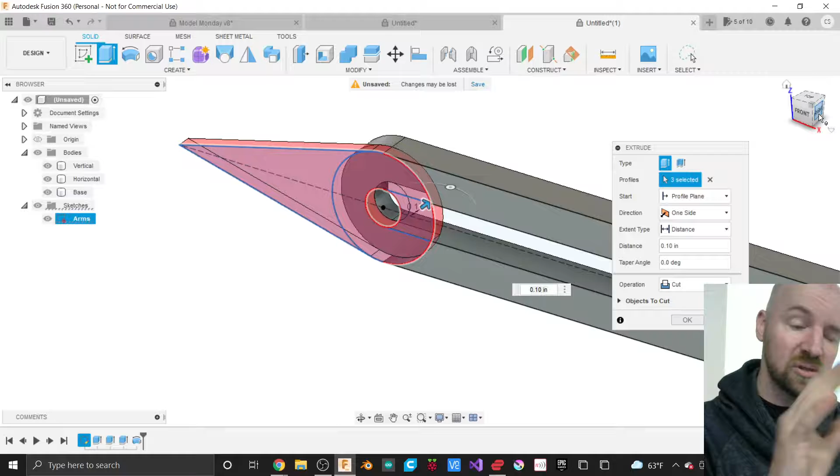Sometimes in Fusion it's difficult to tell what direction you're facing, so you can easily get your perspective skewed, and you have to do some shifting around and figure out which way am I pulling or pushing this thing? Do I need a negative number? Do I need a positive number here? But it's -1/8 of an inch, and we're making again a new body. And then I'm going to say OK.

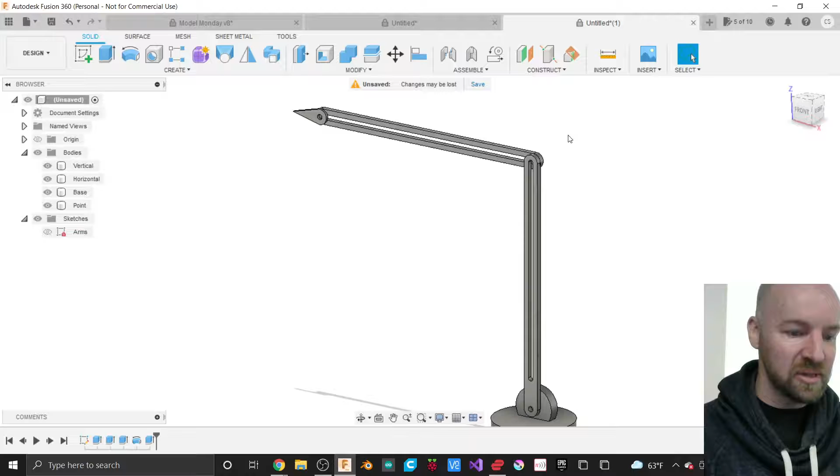So I'll name this, that's my point. Alright, the real purpose of this class is to make joints, but I'm not going to make joints with 10 minutes left in class, because some people get upset when I rush at the end. So instead, with the last 10 minutes, I want to show you how to grab some hardware for our project. Next week we'll actually make the joints where everything moves around and slides, but right now I want to show you that you can insert nuts, bolts, and all sorts of things straight from McMaster-Carr.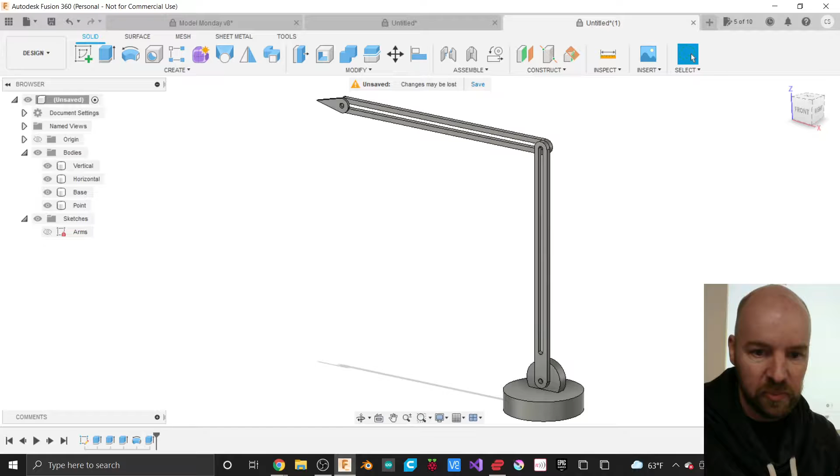So first of all, how are you guys doing? Are you with me? Are we ready to insert some McMaster-Carr components? We're ready at home? Are we ready here in person? Getting there? Not quite? Can I come peek over your shoulder, see what you got? Sure, yeah. Sounding pretty good to me. You got ahead of me and you're scrambling good, trying. No worries, keep up.

You did some of the classical errors. Everything was a construction line, so I had to go back and fix it. Mike had a construction line party because I was going too fast, and made a whole bunch of construction lines. I do that sometimes too - you just start drawing and going to town, and suddenly you realize you've got a lot of dashed lines going on. That's fun, I can't extrude dashed lines. So we just extruded out that shape there that we just made, Mike. Yeah, no worries, no worries.

Let's take a little break. Like I said, I don't want to make us do joints in the last 10 minutes. I think next class we're going to make a lot of joints. There's a lot of joints in this - sliding joints, revolute joints. We'll have to make some rigid joints here too, I think.

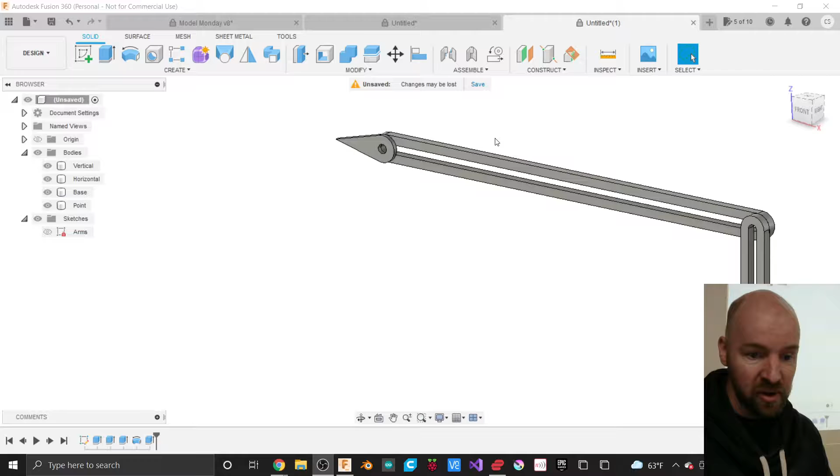The other thing we might do next class is, in addition to doing joints, maybe it's too much to also talk about appearance and materials. Or maybe we'll talk about laser cutting - how to export something for a laser. Would that be interesting to you guys? I use Fusion for that too, yeah? Okay cool, so next class, in addition to joints, we'll talk about my method for making DXF files that I can cut stuff out on a laser.

In fact, I stopped on the way here - just digging in my backpack. I laser cut a couple of things, just kind of, oh I gotta show you, okay caught up, sir - just laser cut a few things on my way here. Just stopped at the other space, quick opened Fusion, shot some laser beams. I'm like in and out in 15 minutes. I love it when that happens.

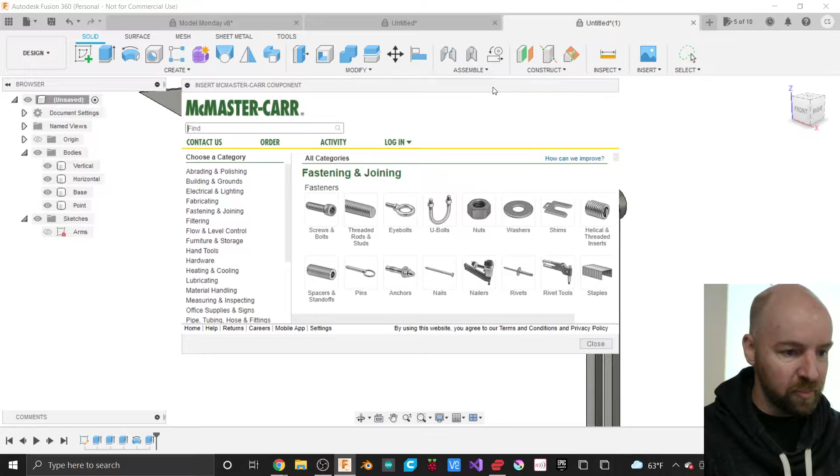Alright, cool. So now the last thing we want to do here in these last couple minutes is show you that we can insert some hardware. In fact, we will indeed need hardware in order to make joints, because we're going to use it as a thing that we make a joint around. So if I click on Insert from my Insert menu, and come down to this McMaster-Carr component option, it opens up our McMaster-Carr window.

For those of you who have seen me do this before, you know I'm a big fan of McMaster-Carr - I order from them at work all the time. This looks like their website. If we just click on screws and bolts here, you can also search - so I could search up here at the top for whatever you're looking for.

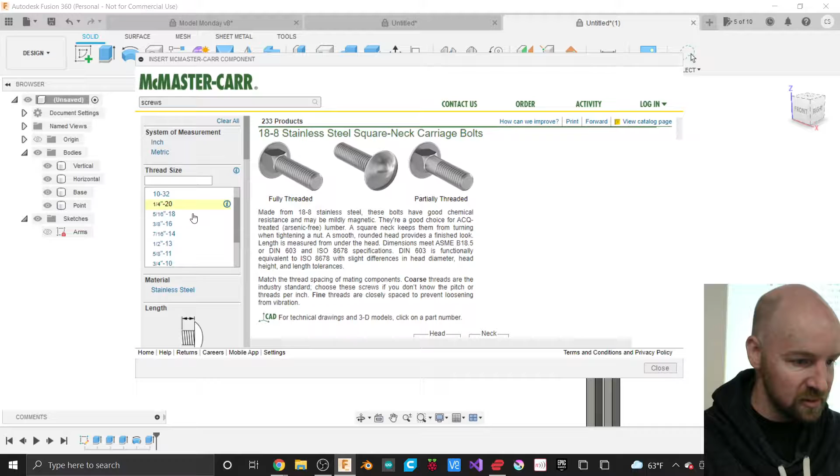The thing that I want is a quarter-20 carriage bolt. I'm going to click on these carriage bolts, because the square end of this carriage bolt will fit really nicely in that slot and give us a nice sliding path. This doesn't need to be anything special - medium grade 5 would probably be fine, but you know what, let's go crazy. It's going to be wet around the pottery area, so let's grab that 18/8 stainless. Then over on the side here, I can scroll and find a size bolt - this is more important than figuring out a material, since we just need this for our drawing. So if I grab this quarter-20 size, now we get all these options. I think we need at least 3/4 of an inch.

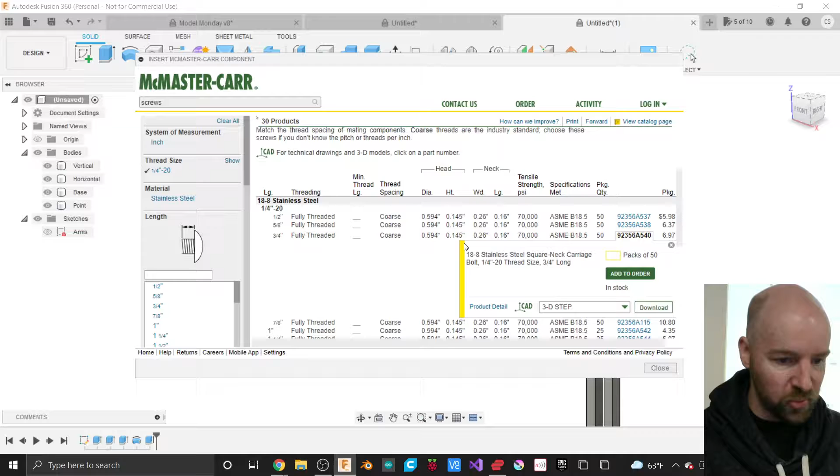So if I hover over this 3/4 fully threaded option here, I can click on the little product number, and then down where you see the product detail, you can download a step file. If it's the first time opening this, it may have defaulted to something like SolidWorks, but for Fusion we want a 3D step file.

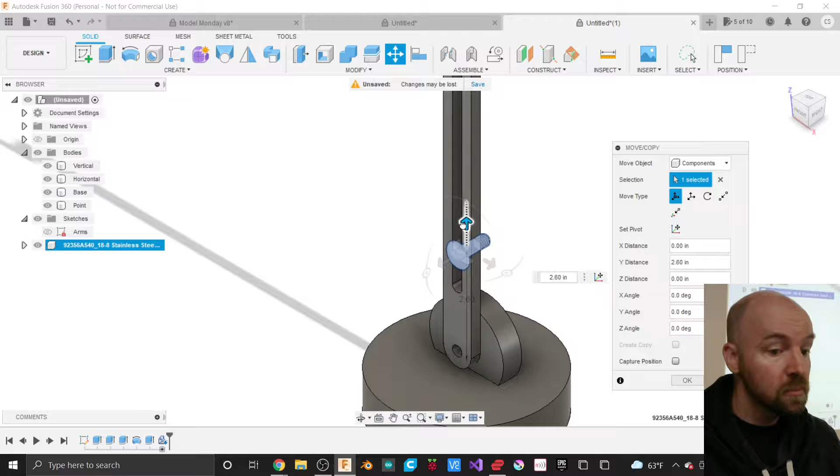Once I've got that quarter-20 carriage bolt that's 3/4 inches long selected, I can just say download. It'll place that right down here at the bottom, and I can use this widget. My little pop-up window doesn't have a download button, so you may have to hover over the corner of the window to resize it. There we go.

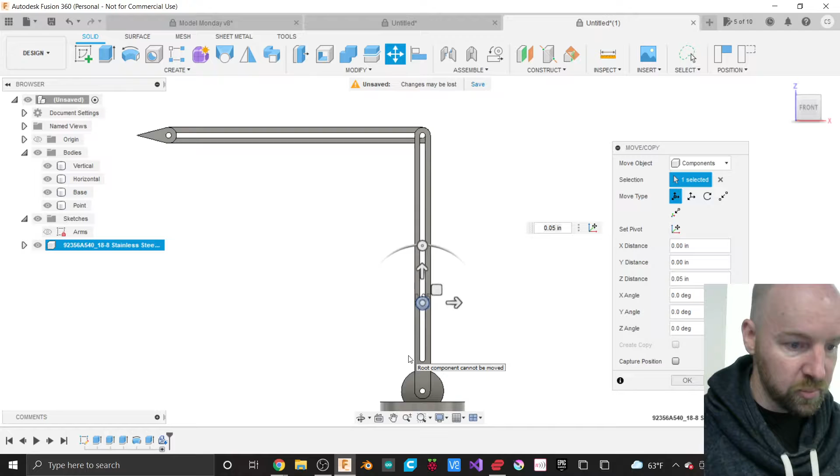Once you download the step file, you can put it into place just with these little move widgets here. It automatically starts off with this move scenario, and now I can place one right at the apex of my rotation, spin around to the other side, and really get it in the right spot. The carriage bolt will only go up so far because it has a square end, but it'll be fine. So I'll place my bolt, and then I can say OK.

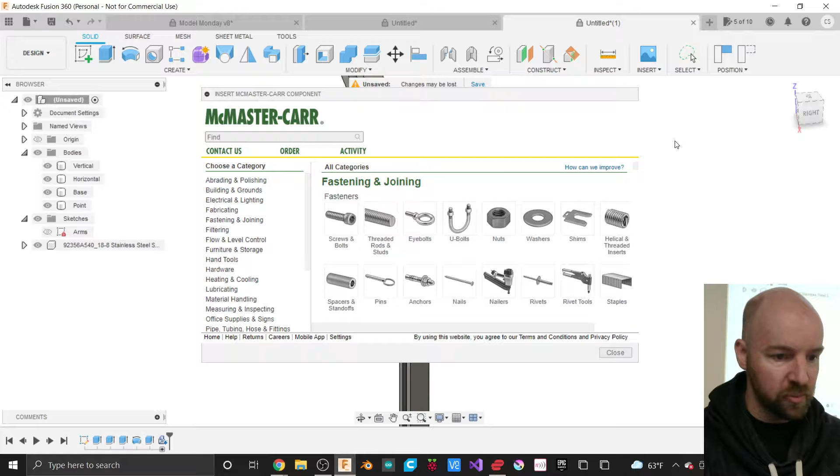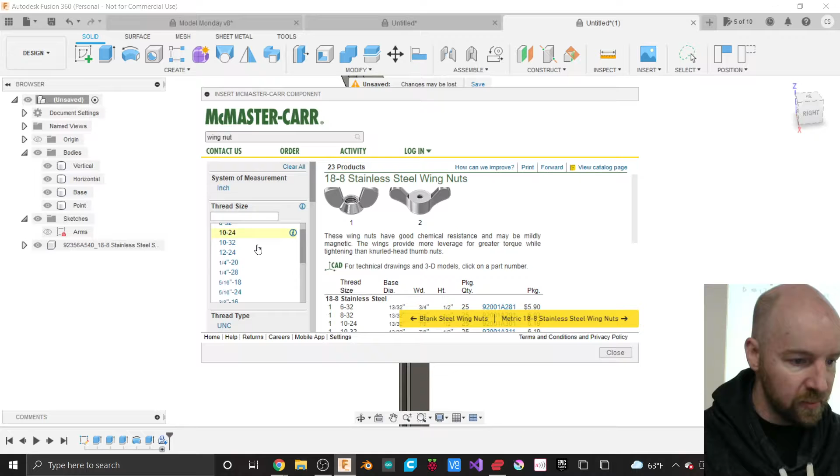And I can do the same thing with a wing nut, so I'll go ahead and insert that as well. I'll go back, grab another McMaster Carr component, and this time search for a wing nut. 18/8 stainless is what we were going for, and I'm going to pick the correct size of 1/4-20. There, I've got my 3D step file, and I can go ahead and say download, then insert that into Fusion here.

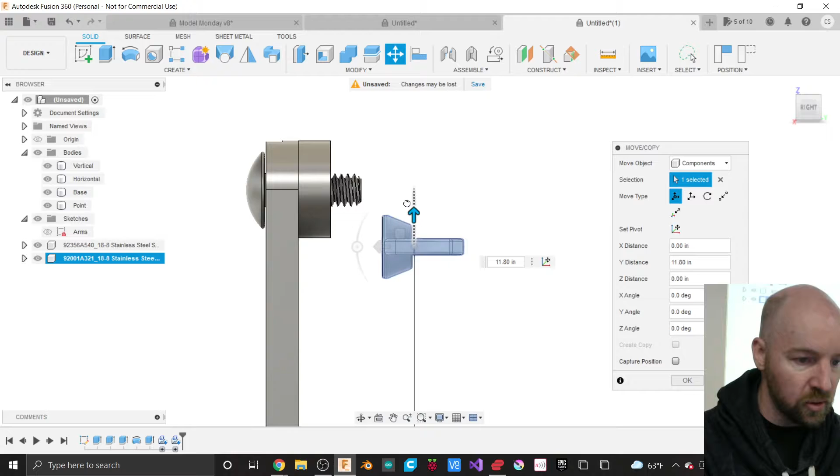It's kind of nice — we did a little bit of drawings the other day. Maybe something else we can talk about next time: included with a drawing, you can have tables, and tables can have part information in them. I believe all these parts we're inserting from McMaster Carr, which you can see as components over here in the browser, can be output as a table — basically a parts list telling you what parts you need to order from McMaster Carr when you're getting ready to make this thing. So you don't have to go back to your drawing; you can just have that parts list printed out and ready to go. Nice.

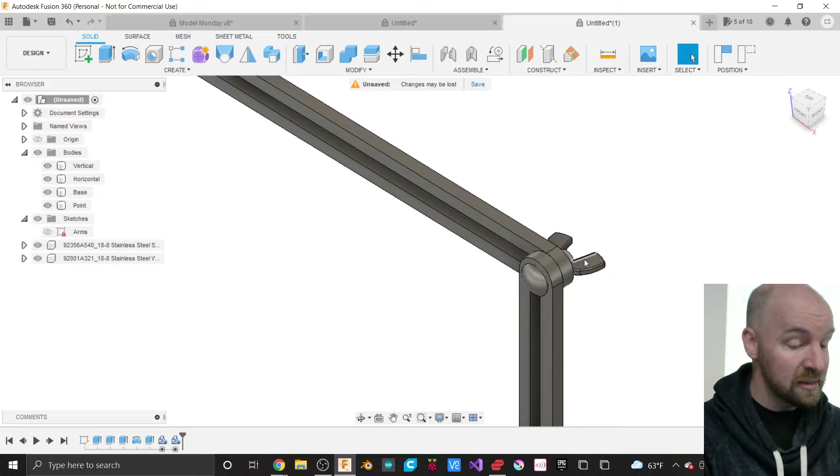So that's going to wrap it up for class this time around. We really need to have these two things here in order to make our joints, at least I think we need them. We don't really need one down there, but feel free to practice going to McMaster Carr and finding a bolt that'll fit right inside of here — get another carriage bolt, I guess. If you're going to do a carriage bolt, this needs to be a square slot in the back, but I'll let you cross that bridge when you get to it. Until next time, when we do joints, this is where we're at with this project.

Any questions before we wrap it up here, guys? You have any burning Fusion questions at home, or any concerns about the project so far? How are you doing?

Cool, thumbs up — I like that they used McMaster Carr and started bringing parts in, it saves so much time. Yeah, it's super handy, man. And the McMaster Carr parts are pretty cheap, it's not like they're charging an arm and a leg for these things. It's amazing they give you that kind of functionality for free. Yeah, I'm shocked, I use it all the time. I think we order more parts from McMaster Carr at work because I just stick them in my drawing all the time, it's real easy to do. Yeah, I think that's why they do it — it increases their sales to make it easier for you to use their parts. Of course, I work for a nonprofit, so we're always asking them for a discount. You take the good with the bad when they give you the free stuff.